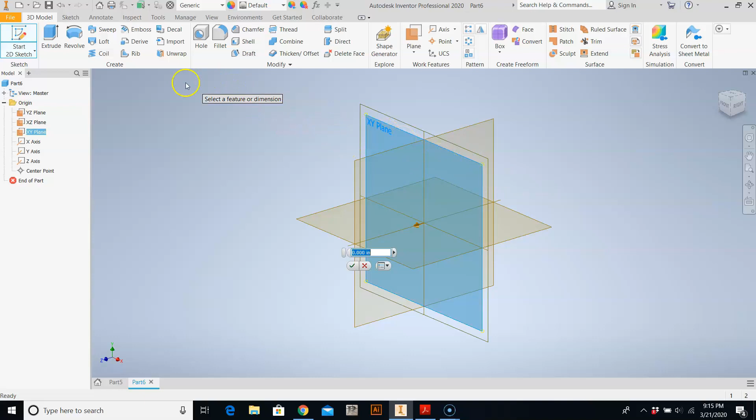So I'm gonna just go back to the whole thing. I'm gonna create a sketch on my XY plane, just as I have been doing before, and sketch out this part once again. And even for this one, I'm gonna show you that if you avoid the mirror feature, you could work around this without having to do the mirror feature.

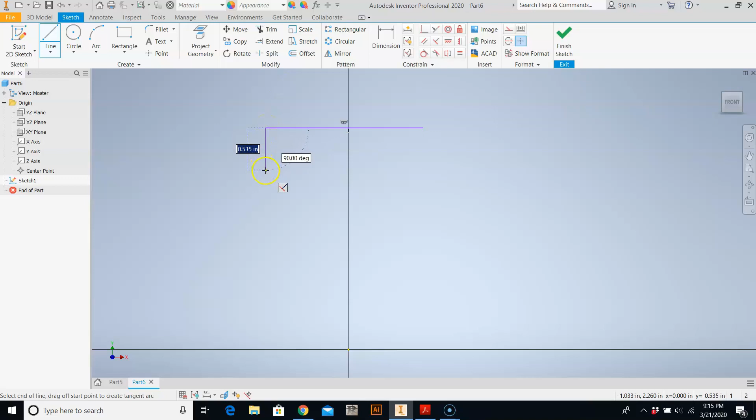What it would involve is actually placing some more dimensions than you may really want to. So I'm just going to go back in here and real quickly sketch out that feature. And you know what? I could actually...

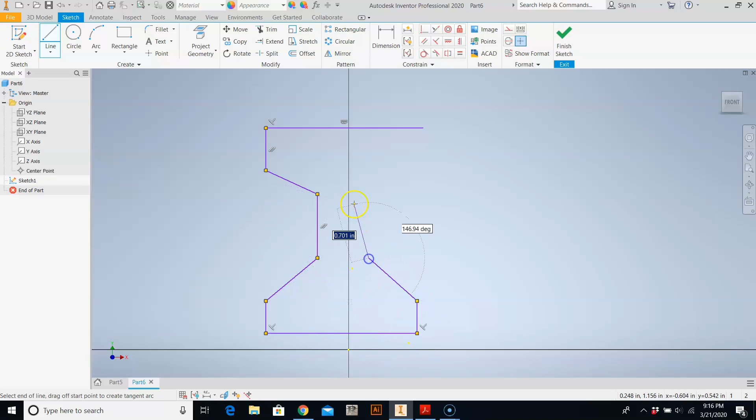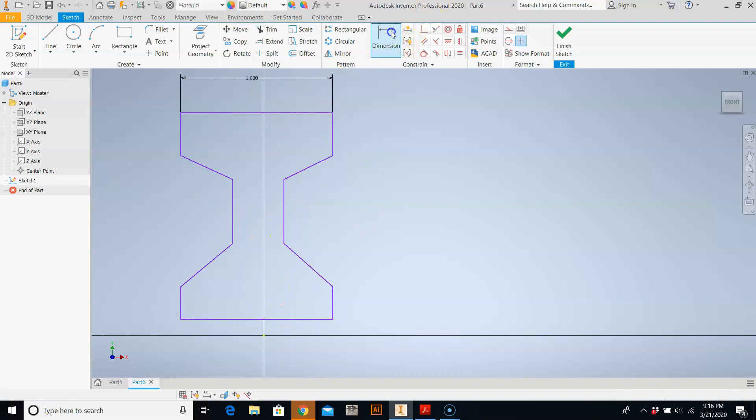So we know that this part, when we dimensioned it, it was a half of an inch, but for the whole dimension is going to be 1 inch. So that's important. And this time, instead of using one of the axes, I'm going to draw a line at the origin, and this is going to be my rotation axis.

And my computer's getting a little slow there. What's going on here? There we go.

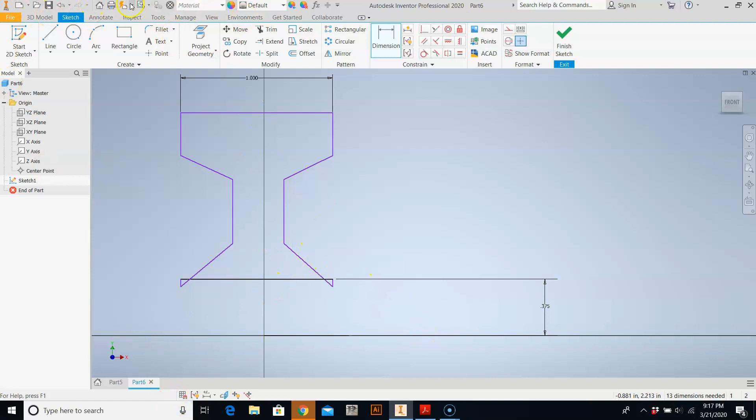So now when I place these dimensions, once again, just a little bit different approach than what was given in the book. If I knew the diameter was 0.75, I could do 0.75 divided by 2, since I'm looking at the radius. And I can see that I don't like what just happened there. So I'm going to undo that for a minute and go back and start with the larger dimensions here. From here to here is 2 inches.

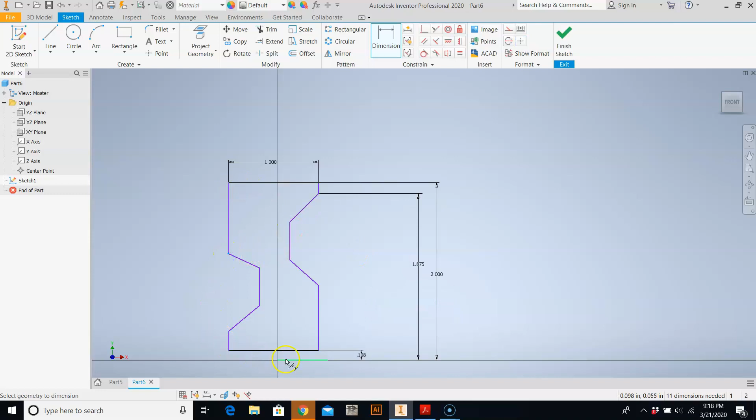There we go. This other one here is 3.75 divided by 2. That would be the same over here on the other side. The inside dimension was 3.5 divided by 2.

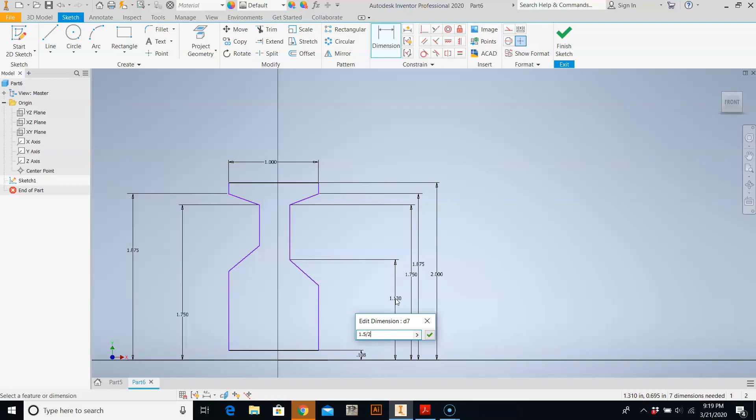Hopefully, as I'm doing this, you can see that if I had set this up a little bit differently, maybe sketching it with the dimensions applied, that could have saved me a lot of time and made those points the same, because right now I'm putting a lot of dimensions on here and having to do it twice. So yes, there's definitely a smarter way of going about this, but I wanted to make sure you saw another different method than what the book gave you.

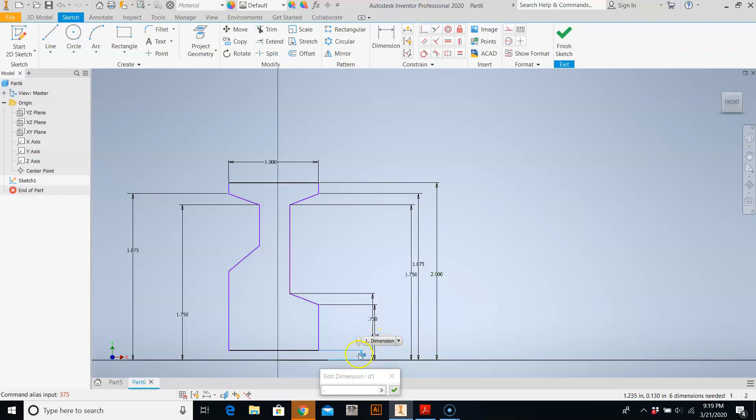So there's always multiple ways of doing things, and you need to find out what works best for you. And I need to stop talking while I'm doing this, I'm messing up. But you need to find what works best for you, and develop that method and stick with it, because it will make you a little bit faster if you find what works for you and things that are easier for you to remember to do.

So I have just, let's see, this one, that one was 0.75. I'm sorry, talking and keeping track of all these numbers at the same time is not always the easiest thing. So let me concentrate here for just a few minutes to get this all wrapped up.

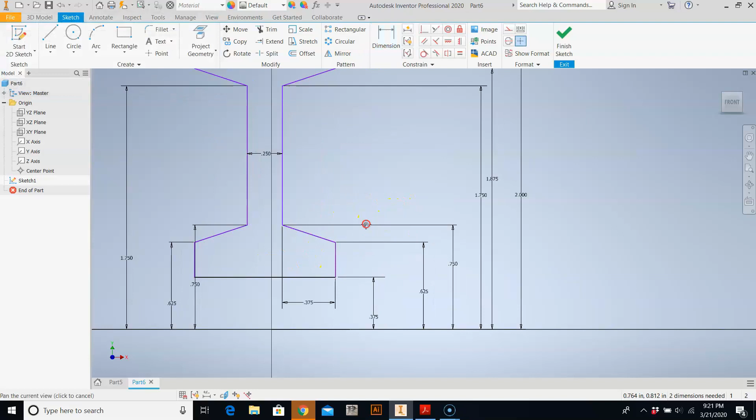Alright, so there we go. This time I've got the whole entire part drawn out, and I'm going to use the revolve command. I'm going to use this line right here as my axis. So I'm going to finish my sketch and use the revolve command, and that's not, I meant to hit revolve.

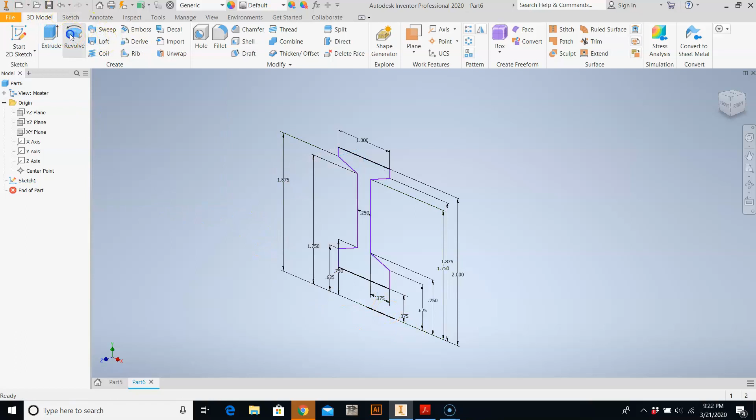So I'm going to use revolve. There's my profile that's already selected. When I select my axis this time, I'm going to pick this line right here, and it's going to revolve around that line. Hit OK, and there we go.

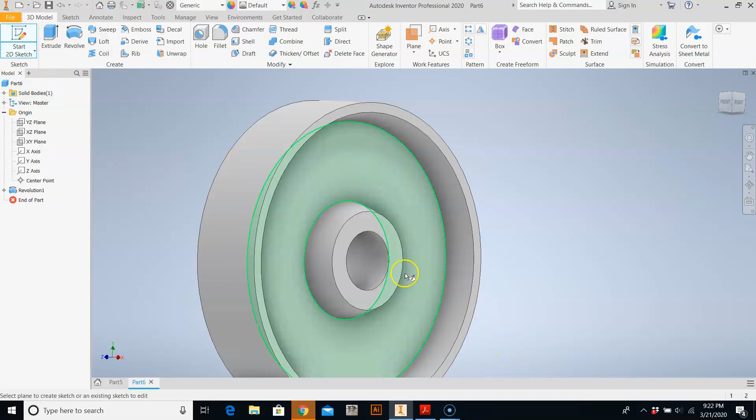So just a little bit more work as far as dimensioning, but some people might find that a little bit more simple to keep up with. It's pretty easy if you're sketching something — I'm just going to start a new sketch here — but you sketch, you can create a line and keep that as an axis point, and you may find that it's a little bit easier.

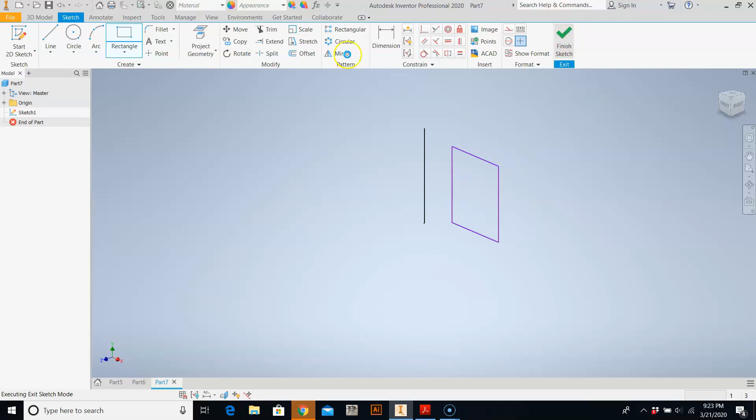So just real quickly, picking this here, drawing a line for my axis, creating a sketch of some sort. I'll just pick that there, putting that dimension, using the revolve command. Here's the profile, here is the axis, revolving it and hitting OK.

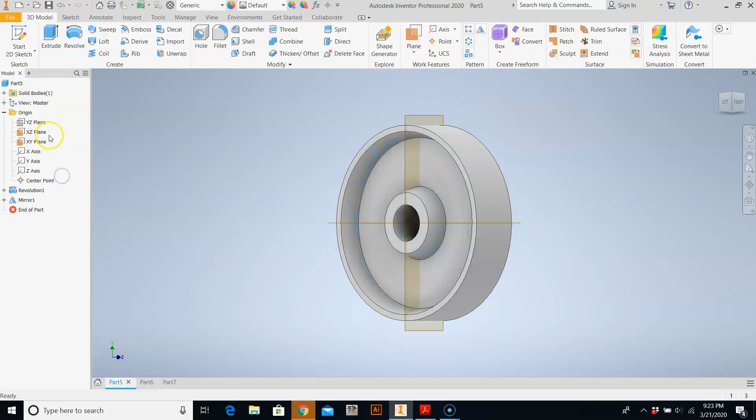So it's just another way, instead of working with all the planes and the axis. If that bogs you down and makes it more complicated than it needs to be, just think of it in simple terms of drawing a line and using it as your axis. So what I'm going to do now is turn those work planes off. I don't like to have those on when I'm working.

The next thing we're going to look towards is creating a pattern. We're going to sketch out the hole on this piece here, and then use the pattern command, the circular pattern command, in order to array those, so that way you only have to draw it one time and use one of the feature commands to make this work a little quicker.

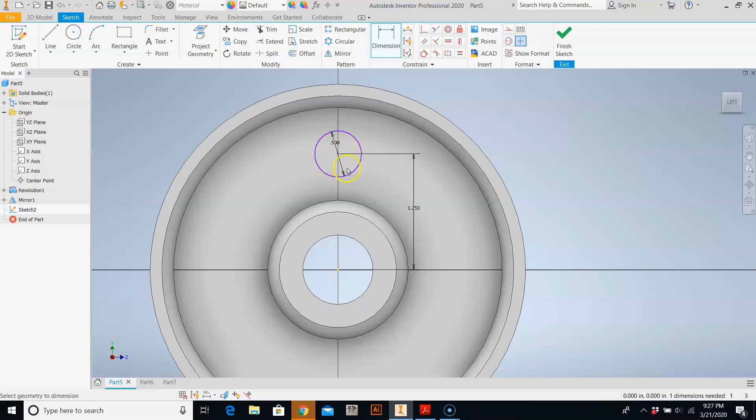As we do the next feature on this part, I'm going to fast forward through the 11-15, 11-16, and 11-17 pages. They have you draw this part over here on the side and then modify the angle. So if I were drawing this part and saw that this hole needed to be here on the vertical axis, I would probably just go ahead and start from there to begin with.

So the cut feature for this, I'm going to go ahead and cut that hole out after I finish sketching it. And when I do that, this is now a feature that has been cut, and now this is something we can use in order to use one of our pattern features.

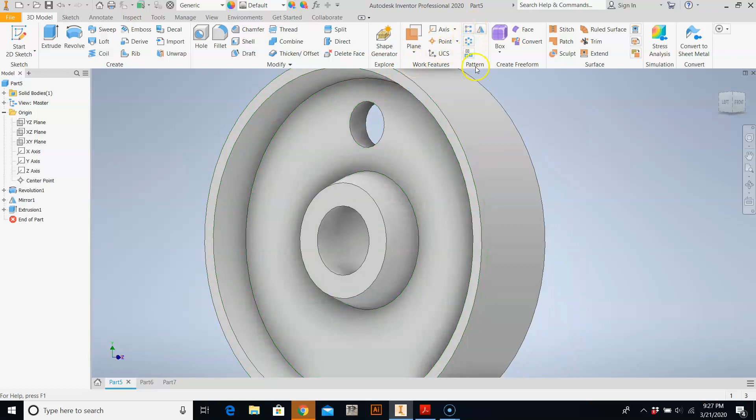Once this has been done, I'm going to look over here under my pattern again. I do have a circular pattern. This circular pattern will basically array whatever feature you point to. So you have to remember that you actually have to physically cut this out before using this particular command. This one is intended to array the feature.

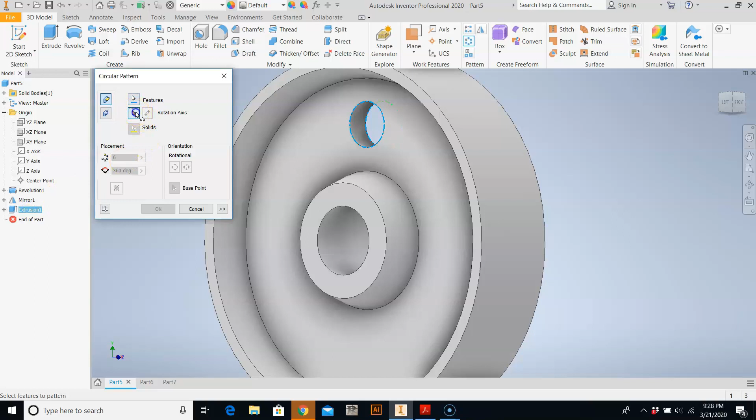So the feature is Extrusion 1 on this drawing. When you point to either the feature right here on the part, or point to Extrusion 1 over here on your browser, that is the actual feature it's looking for. Select that, and then you're going to be looking for the rotation axis. Point to the rotation axis, and then I just pick something, some part that has a circular point to it, so then it's going to revolve around that axis.

Here you can change the number of items. For this one, it's going to be 5. Change that to 5, 360 degrees. Here you could change your rotation if you needed to. I usually leave that set the way it is, and you can see it just revolving those cutouts. Just hit OK, and that is quickly done.

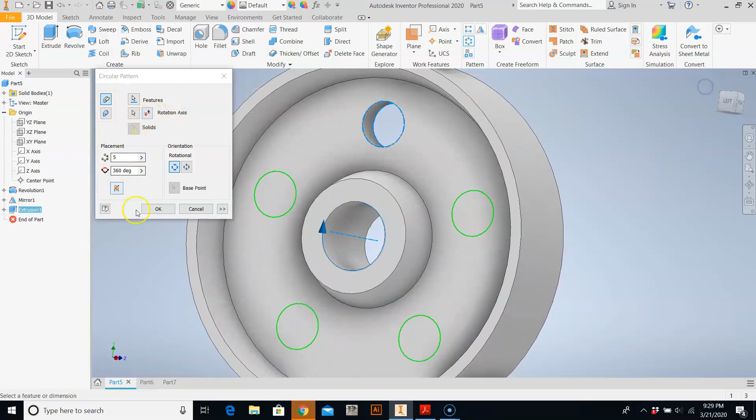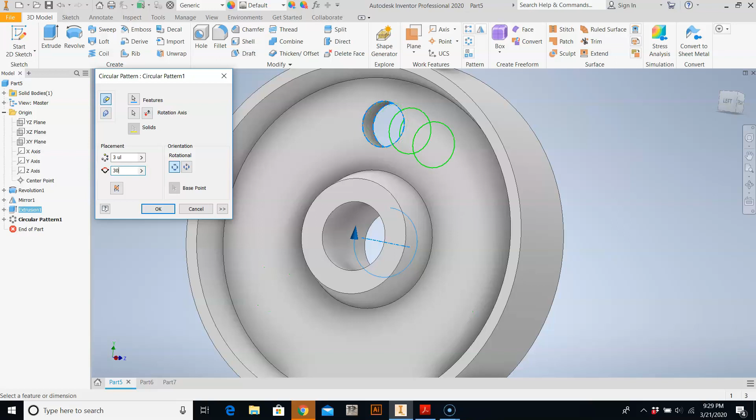If you ever needed to go back and change anything, that's a feature, so it can be edited. If I wanted to change that to 3, once again just type in 360 degrees. If I wanted to change the angle, let's say I had 3 of them but only wanted it within 30 degrees, it could draw those as well. So you have some options there. I'm going to leave it like that.

The important thing to remember when working with this is that you're selecting the feature. So make sure you draw the circle on there, go ahead and cut it out. As soon as you cut it out, that's now an extrusion, and that's what you're looking to do with your circular pattern - you're looking to actually array that feature itself.

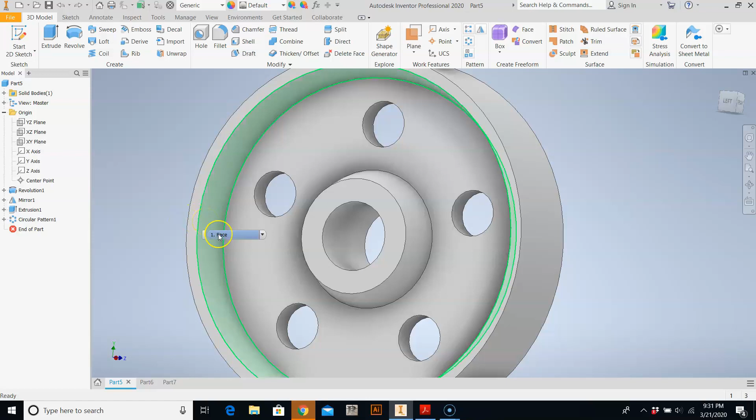As we look into the next couple pages of this chapter, it's about drawing a title block. I am going to skip over that. It's probably a little bit more based on AutoCAD, not really worth the time it would take to draw that title block, and I probably wouldn't end up using it anyway. So I'm going to skip over that part and move straight into creating a section using this part for the next section. I'll save this part, and then we'll set up the drawing for the next portion.